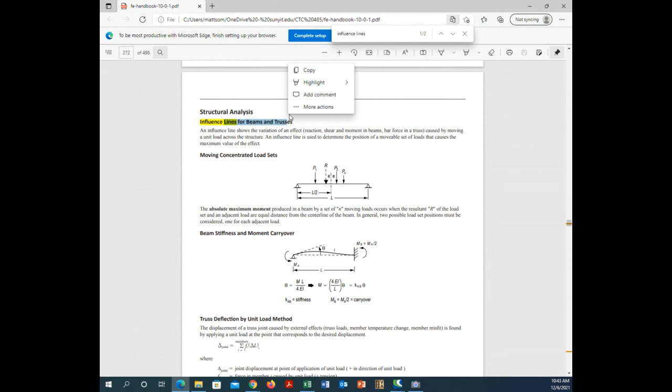That's the point of this lecture today — to help you, because a lot of you will probably go on to take the FE at some point, and if you do, hopefully this helps you out a little bit. If this lecture just confuses you, you can walk out and forget it, and it won't impact your grade at all. It just might impact how you do on the FE. This is totally just for your benefit, because I care about you guys and want you to pass the FE.

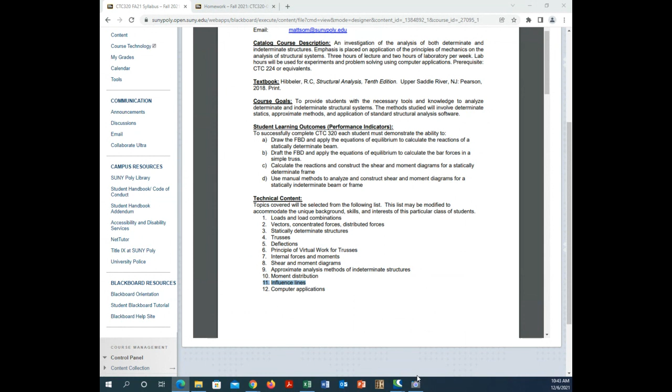So what is an influence line? Let's go back to what the FE says an influence line is. An influence line shows the variation of an effect — reaction, shear, or moment in beams, or a bar force in a truss — caused by moving a unit load across the structure.

Let's think about that for a second. If we take a moving load, like on a transportation structure, you have a car going across a bridge. Let's say you want to put a connection in that bridge somewhere. You want to figure out where that car will be to put the most shear on that connection, or where it will be to put the most moment on that connection. Does that make sense? So the influence line gives you a graphical way to figure that out.

So that's what it means — it shows the variation of an effect. If you move that load across this beam or across a truss, how is it going to impact the shear, the moment, or the bar force in a truss? How's it going to impact it? Right, so that's kind of where we're going to start.

I have another definition here that I got from somebody else as well that I'll throw down. But basically, the influence line is used to determine the position of a movable set of loads that causes the maximum value of the effect. So that's what we're trying to do — get the maximum value of that effect.

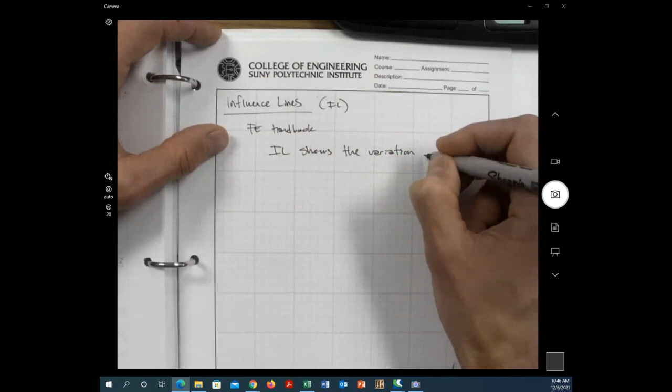we're told that an influence line, IL for short, shows the variation of an effect - and I'll put in parentheses reaction, because we can use them for reactions. We can use them for shear. We can use them for moment, or we can use them for a bar force in a truss.

And we're going to look at both of these today, caused by moving a unit load across the structure.

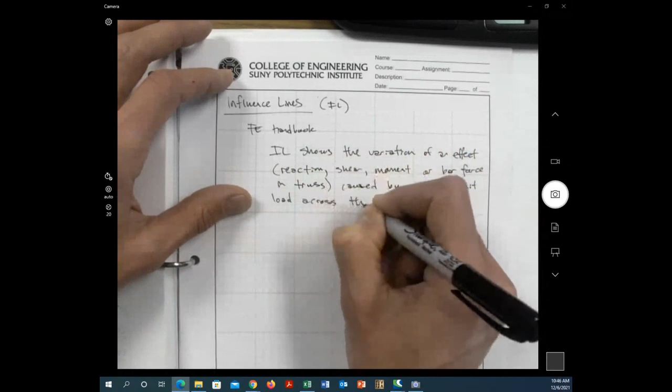So the point of this is to figure out that these are used, and the FE goes on to say that these are used to determine essentially the placement of the load that will cause the maximum effect.

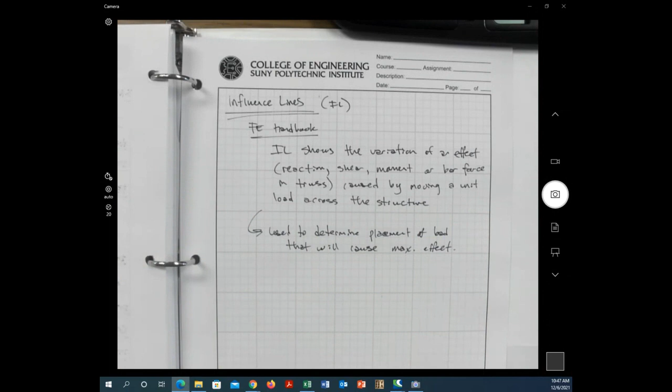So before I go too far, let's just do a case here to illustrate this, and then I'll give you another little principle of how to make it work. But before we go too far, what I want to do here is give you an idea: if we have a simply supported beam,

and I've got somebody who just likes to run across this bridge just because, you know, they like to suffer. It's okay, I went for a run the other day, and my wife's like, 'How was that?' I was like, I just walked in from outside in the cold, and I couldn't breathe. You ever do that where you go from outside breathing hard to an inside warm, like cold to warm, and all of a sudden you cough and can't breathe? She's like, 'How was it?' I was like, terrible. You know, it's like, what can I say? I can't talk.

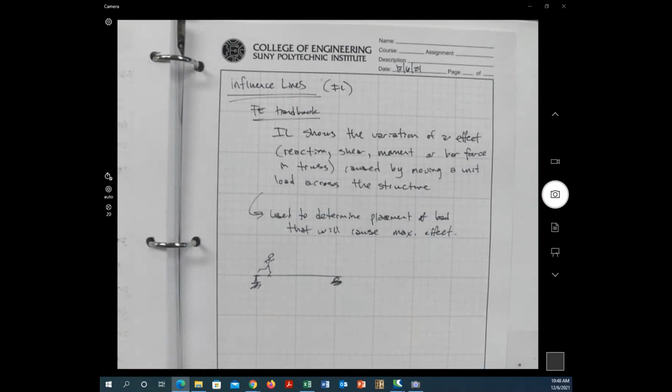Anyway, here's somebody who likes to suffer. He's running on a bridge. Let's say that bridge has some length, L, or beam L. And as this guy or girl moves, there's some distance x, so this is a distance x away from point A. Can you picture that?

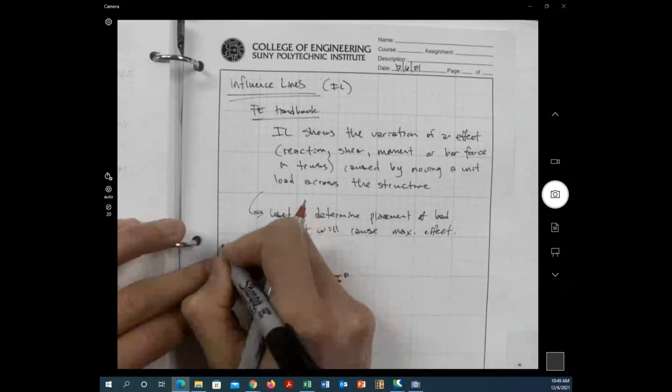So for various values of x, let's look at, for this example, the influence line for the reaction at A. Well, what the influence line essentially does is it says, okay, if we have an x value, we can find an AY value, and we can find an influence line value here.

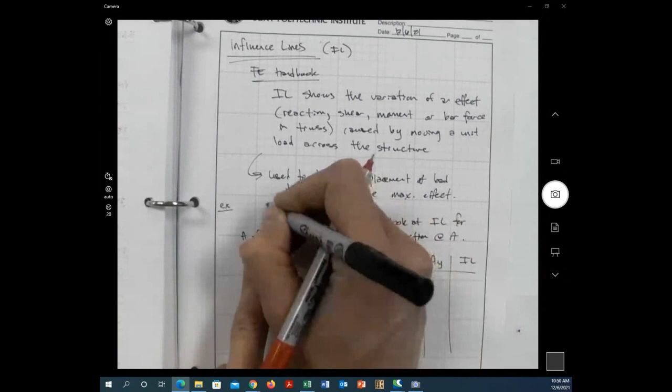So for example, if x is 0, what does that mean? It means this person - I'm going to say has a weight P - is directly over support A. So how much is AY holding up? All of P, right? Does that make sense? If x is 0, this person is right over A, so AY is taking all of P.

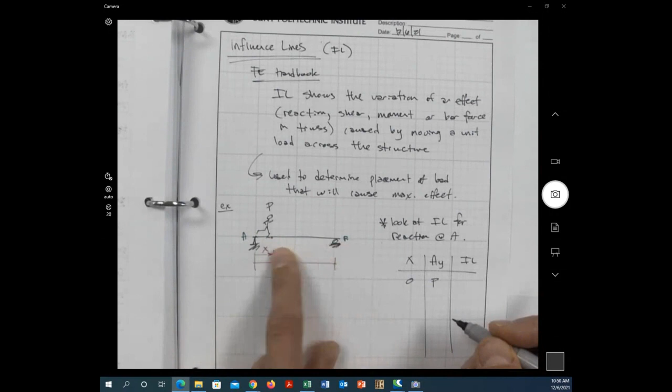Okay, I'll come back to this influence line thing in a second, but if this person's all the way at B, how much is A taking? None, right? So if they're standing on B, A is taking 0. So if x equals L, the influence line value at AY - I'm just solving AY - we know that if we solve it at B, the AY value is going to be 0 because all the force goes right to B.

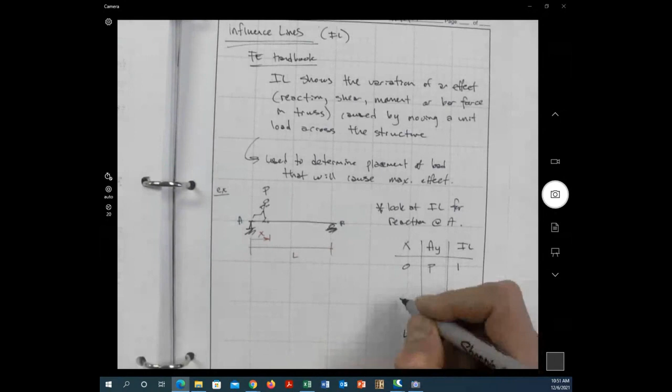We could say, well, what about 3L over 4? So if they were over here, we'd say 1P over 4. Or if they were at a quarter L, we could say 3P over 4. We could use the same principle to solve these things. This is 3P over 4, or 3/4 P or 1/4 P. Basically what we get here is 0.75, 0.5, 0.25. So if P was 1, this influence line is kind of like assuming P equals 1.

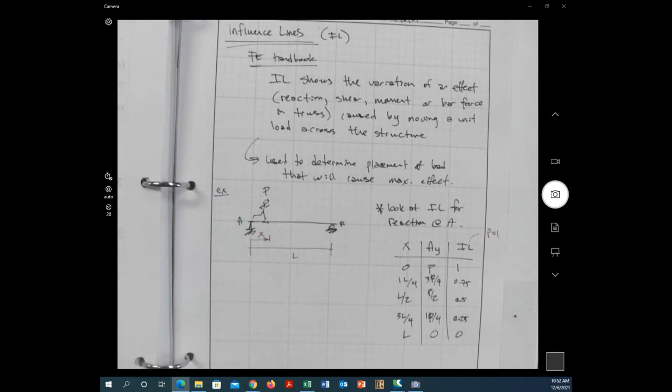So what does that mean? That means we have this chart here. I'm going to draw a couple lines down. Basically what we have here is an influence line for the reaction at AY.

Basically what we're going to do is start at 0, and we're going to plot the value 1. We're going to come out all the way over to L, and we're going to plot 0. What you can see is this is just going to be a straight line down. So this is going to be 0.5, this is going to be 0.75, and this is going to be like our 0.25.

In this case, hopefully you can do this in your head because it makes sense. If this person's standing right at A, you take P times the influence line value, and you figure out the reaction at A is going to be P. You could use this chart: if they're in the middle, P times 0.5 is going to give us the reaction at A. Or P times 0.25 if they're over here. So if they're standing right on top of A, it's going to have the most impact at A. Does that make sense? Okay.

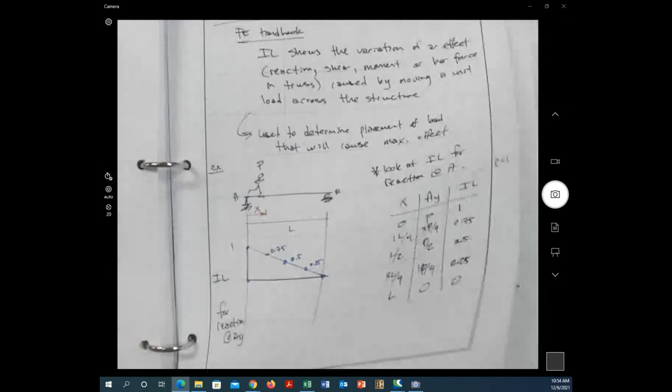So what this leads us to is kind of an idea of how to do this. This is kind of like a brute force way of doing an influence line. But there's easier ways to do influence lines, and I want to go through that next. For influence lines, there's kind of a method to make them, just like there's an approach to doing shear moment diagrams.

For influence lines, what we're going to do is develop them by adding unit displacements that correspond with what we're trying to find.

So for example, what we just did was we were looking at a reaction. For a reaction, we might have some beam here, but we want this reaction. What we're going to do is come over here and remove the support at that location, at the location of interest.

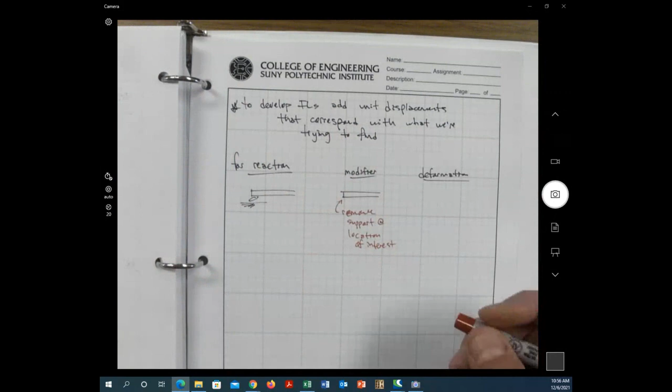So this is how we modify it. And then the deformation we're going to look at is what I said up here, we're going to apply a unit displacement. So if we want the reaction in the vertical direction, let's look at a unit displacement. Let's say maybe this had a pin on this side. If this had a pin on this side, we leave the pin on this side, then what's a unit deformation look like? It says, okay, we started with a beam that was flat, and what we're going to do here is apply a unit deformation of 1, and now we're going to take a look at this thing again.

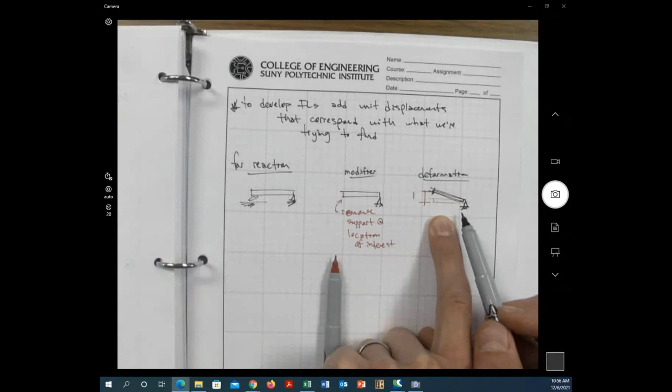And that becomes our influence line. So what we just did here is basically solve for our influence line. All we did is say, okay, we want to know about AY. We're going to take AY off, then apply a 1 unit deformation in the direction of the force, and that becomes our influence line. So our influence line is just this 1 unit deformation, and that's all it is, it goes up to 1, and then back down to 0 here because we know we're constrained by no deformation at the pin over here. Does that make sense? So all we did was take this out, applied unit 1, and got our point.

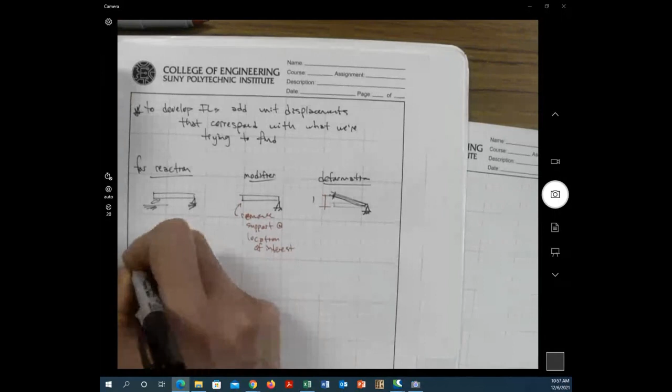Okay, we could also have a couple other things. We could also be looking for shear, so for shear at a point.

So we might start with some beam, and let's say we want to find shear at this point here. What we're going to do is modify this by adding essentially a vertical roller. The way I'm going to show this is I'm just going to put a roller like this. Normally I only do 3, but here we add a vertical roller.

Okay, so if we still had our simply supported beam here, what's that going to look like? What's our deformation going to look like here?

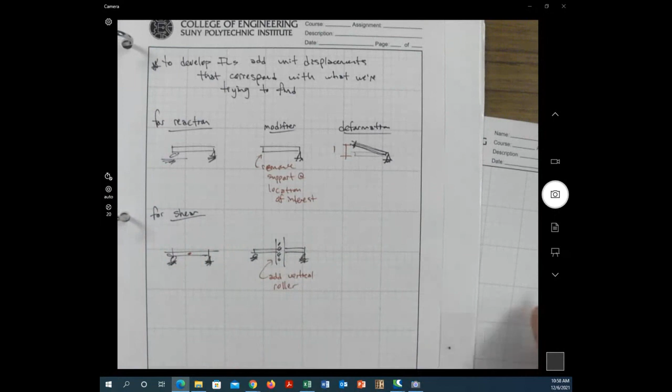This is where we have to understand our sign conventions a little bit. Our shear sign convention basically says this: on the right side of the beam, it's going to go down. On the left side of the beam, it's going to go up. That's our positive sign convention. So that's what we're going to start with here. If you remember when we drew our typical positive, the right side's down, left side's up, positive tension. This is our general positive sign convention. So the right side of the beam's going down, the left side of the beam's going up.

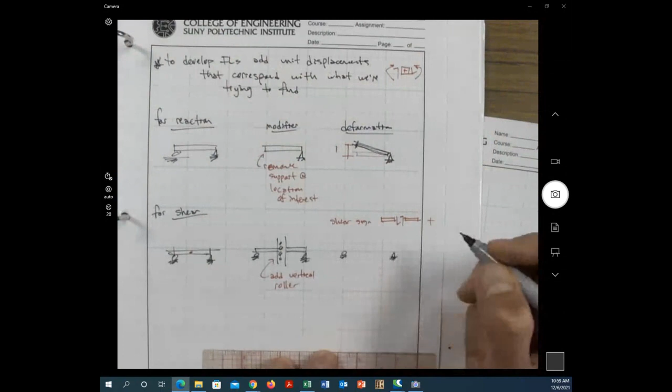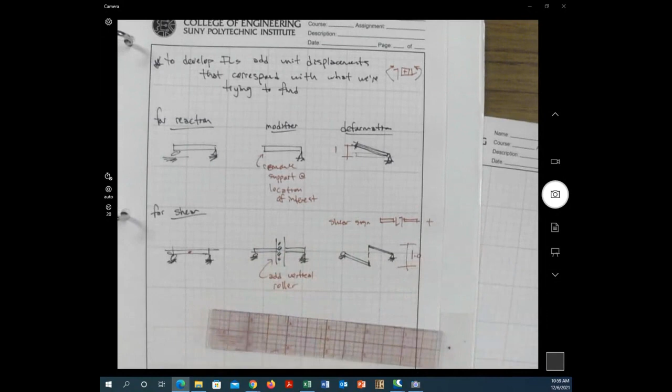So what does that look like over here? The left side's going to go down, the right side's going to go up. And if this is connected, basically what we know here is this total deformation is going to be 1.0. So if this is right in the middle of the beam, it's easy - it goes down a half and up a half. If it's not in the middle of the beam, it has to be proportional so that these slopes are the same.

Okay, so that's kind of the idea with shear. And then lastly, for moment...

Right, we can start with this beam, and let's say we want to find the moment at this point. What we're going to do is we're going to add a hinge or a pin.

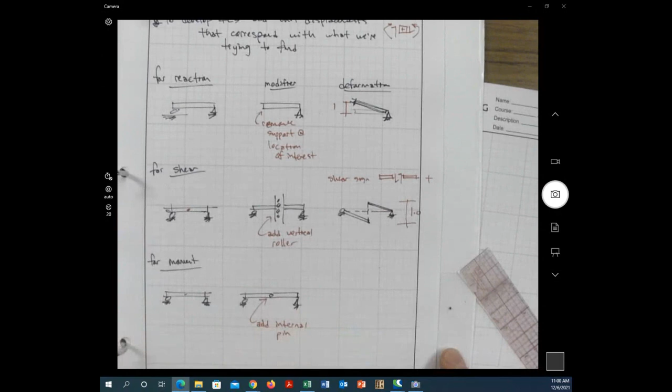So we allow the moment to rotate. Like here, we allow this thing to move up and down, like we allow it to shear. Here, we allow it to rotate because we're looking for the moment. We kind of release that moment, just like in the moment distribution where we lock it, we temporarily fix it. Here, we kind of add an internal pin to release it.

Okay, and what does the deformation look like? We want to apply a unit rotation, which means basically what's going to happen is we apply in a positive sign convention, kind of like up here - we put tension on the bottom, compression on the top. This thing's going to push up, and it's going to come up to something like this, having a unit rotation.

If this is theta A and this is theta B, if I were to bring this out here, this whole deformation is 1.0 - the whole angle is 1.0. So theta A plus theta B equals 1. And for small deformations, we can just work with it directly.

So that's great, Mark. We sort of did it for this - how does that work out? How does that play out? What does that actually look like for something that's a little bit more complicated? Do you want to look at something maybe more complicated? Why not?

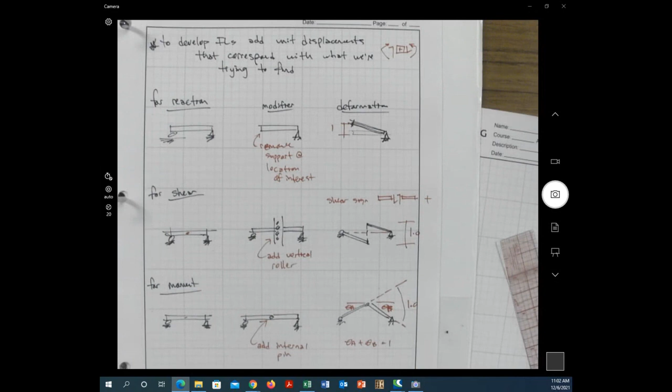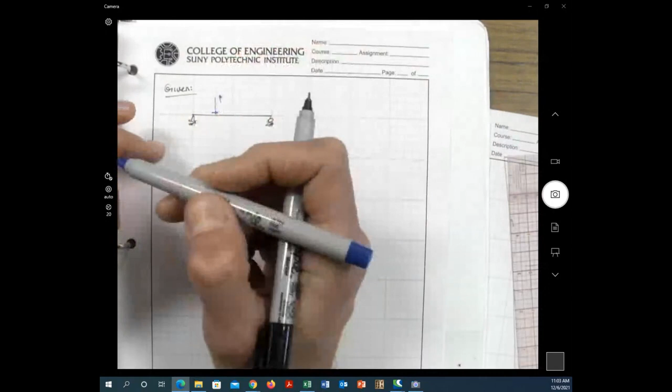Okay, let's start with an easier one and we'll go to a harder one. So let's look at that same beam that we started with, and let's say that we have a beam here that's simply supported, and what we're going to do is have some load P that can be moving across this beam, just like we did when we started. So this is going to be some distance x, and this total length, let's call it L.

So what we want to do is find the influence line for moment at the center of the span.

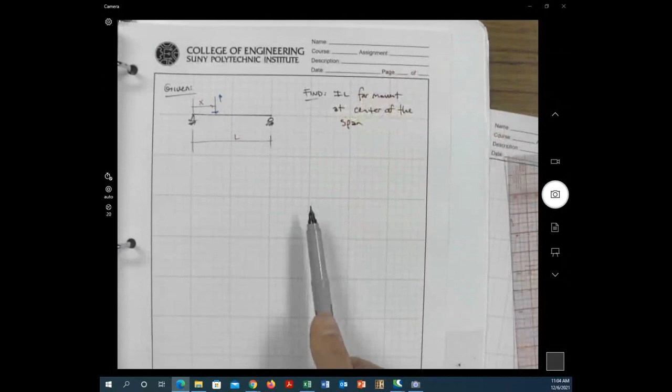Right? I mean, intuitively, we don't really need an influence line for this, because intuitively, what do we know? We know that the moment at the center of the span is going to be biggest when P is at the center of the span. Does that make sense?

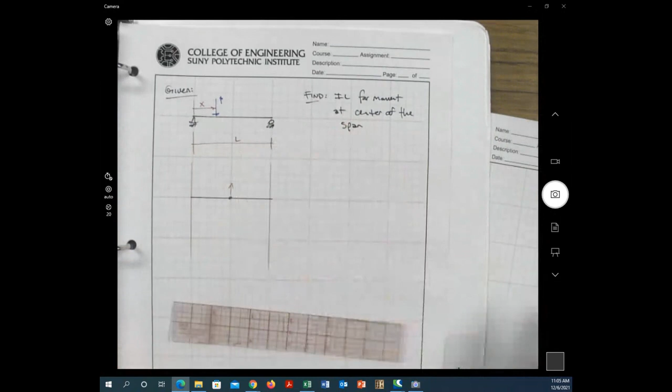But the influence line kind of helps us a little bit, and I'll show you a little bit why. Let's take a look at what that looks like here. So if we were to draw our influence line, we're going to start essentially with this diagram, this beam. We're going to add this hinge in, and then we're going to push it up so that we get essentially a rotation here.

So this becomes our rotation. And what we know here is we're going to have theta A, theta B, right? And we know that theta A plus theta B equals 1.0. Because it's symmetric, this makes it a little bit easier, theta A is going to equal theta B. If we didn't know it was symmetric, we could also solve it, and we could definitely solve it. I have that example here if you want to go over that one too.

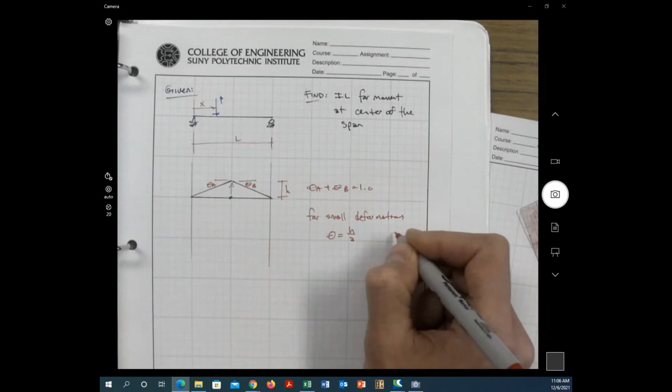But for small deformations, theta is going to essentially equal h over a. So what we want to find here is what this height is, and so if we have h, we have theta, and we have a, we should be able to solve for h. Here we know this is L over 2 because we were told we want it at the center of the span.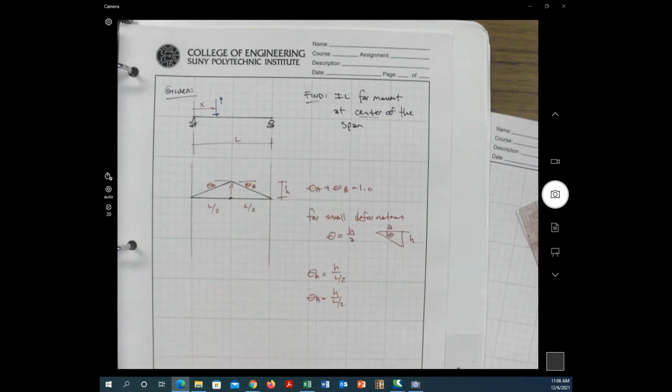Right, so what's theta going to be? Well, in this case, theta A equals H over L over 2. Theta B equals H over L over 2. And because these are the same, you can see that these two are going to be the same, theta A is going to equal theta B. But when we plug these in, what are we going to get? We're going to get H over L over 2 plus H over L over 2 is going to equal 1.0.

I don't like that L over 2 thing, I'm going to say 2H over L plus 2H over L equals 1.0. So what do we get? We get 4H over L equals 1.0. We get H equals basically L over 4, because if we multiply both sides by L, we get L over 4.

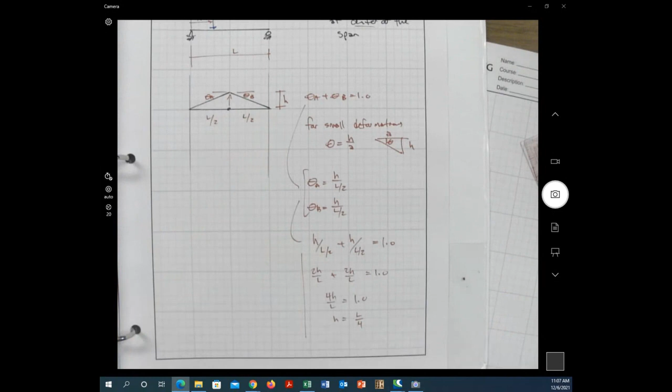You see that? Okay, so what does this mean? That means our influence line is going to look like this. We're going to come up to, I'm sorry, L over 4. This has a maximum value of L over 4. So if we said, for let's say L equals 40 feet, this value here is going to be 10.

Why is that helpful? Well, if P equals 60 kips, the person just got really heavy. Actually, it's more like a big fat truckload. Let's say it's a big fat truckload. I mean, we could do 60, we could do 40, we could do 20. But let's say P equals 60 kips, L equals 40 feet.

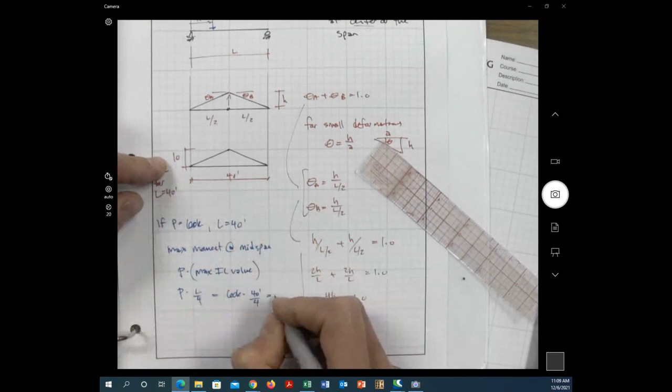The max moment at the midspan is equal to what? Well, it's basically equal to P times the max influence line value, which is P times 10. In other words, it's P times L over 4, which is equal to P, which is 60 kips, times L, which is 40 feet, over 4. Or really what it was, P times 60 kips times 10 feet. So the max moment is going to be, what, 60 times 10 is 600 kip feet.

Okay, it's a little convoluted, but let's just play this game for a second, because what we can do is we can also find, well, if the load P is at 10 feet, what's the moment? Well, instead of being 10, it's going to be 5. So 5 times P, 5 times 60 is 300.

That makes sense? So if I take this and we come back into visual analysis, I shouldn't have made it 40 feet, that's too long. Actually, no, I can't fit 40 feet on here. So if I make this 40 feet and instead of using the vertical axis, I'm going to make this a plane frame. I'm going to make this simply supported.

Okay, I can put a load on this member. I'm going to do a point load, a single point, and say minus 60 kips. So if my offset's 20 feet right now, that's right in the middle, and I can take this beam.

I can go to result view, member graph. What we see is the maximum moment 600, just like we found.

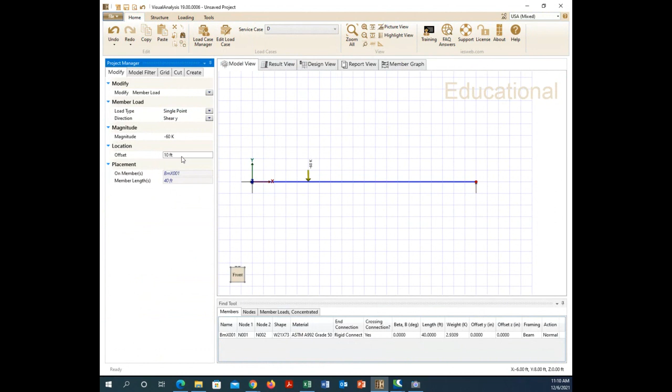But the other thing we can find is, if I come back here and say, well, how is this influenced if this is at 10 feet? What we just said is, if this is at 10 feet, this value on our influence line is 5. So 5 times P, 5 times 60, gives us 300.

That should give us our moment here. So if we come back to result view, our maximum moment at the center, not at this point, our maximum moment at the center is 300.

Again, this is just for the center of the beam. This is the influence line for the moment at the center of the beam. It doesn't mean it's the maximum moment at this point. Just because the load's there, the maximum moment will also be there, but the moment at the center is going to be 5 times P.

Make a little bit of sense, kind of, sort of. Let's look at one a little bit more complicated, then we'll go to trusses. Again, this is super brief. I wish I could do more, but at least it gets you in the ballpark, so if you study this stuff later, you've seen it to a certain degree. Maybe you'll care then. Okay, but let's look at this.

Let's look at something like this. For the beam shown, find the influence lines for shear and moment at C.

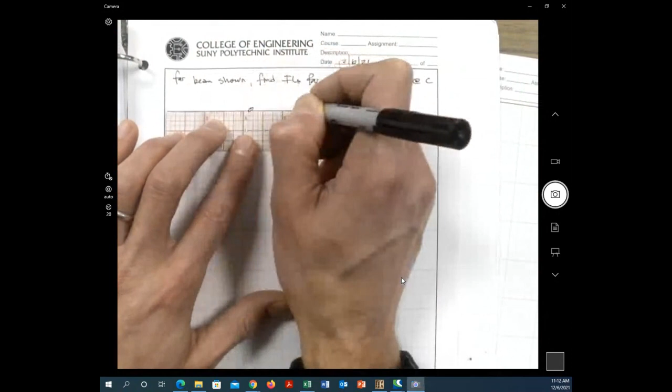Let me draw you a beam here. I'm going to start with a free end that goes to a roller, that goes to a pin. So this beam is going to look like this. Let me give you some dimensions, and some points too. I'm going to call this point A, this point B, the middle point C, and this point D.

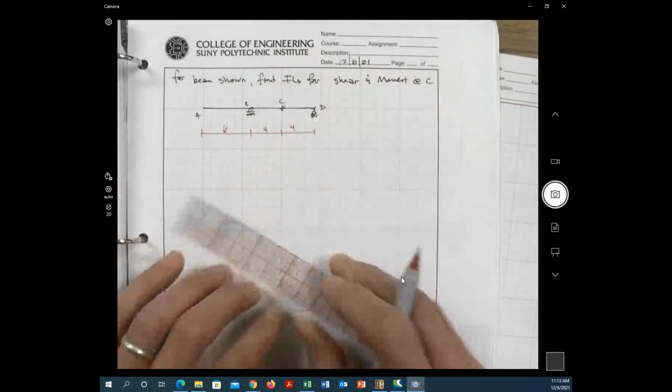What else do we want? We're going to call this 6, this 4, and this 4. And this is P, and it's going to move some distance X. I probably should have put the P on the other side, but whatever. It's going to move across the structure, across the beam.

So let's start with shear. Shear is kind of a tricky one, but let's start with shear. I mean, we could just brute force this. If you were on the test, you could put that force at a whole bunch of points and try to figure out which one makes C the biggest. We could guess over here, guess over here, guess a bunch of different places, and try to figure that out.

I went and I think I made a model of this beam. Let's see if it opens here. I put this beam into visual analysis, and we could take a look at it.

Basically, I have a 1 kip load somewhere on this beam. If I go to my result view, I have a member graph, and at this point C, I have a moment of 1.5 or whatever it is. And I could do that for a whole bunch of points.

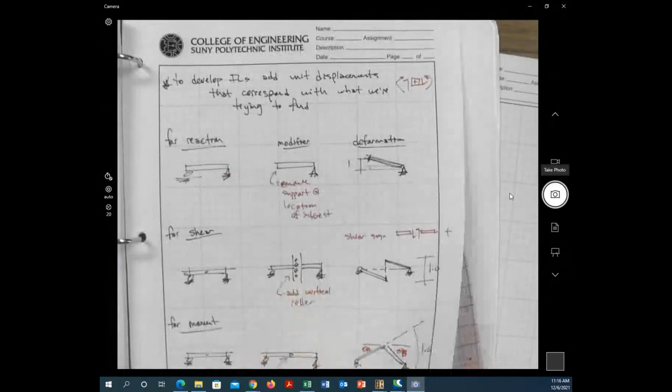So rather than manually incrementing that load across it, what we're going to do is come back here, and if you remember what I said with shear, we're going to add this vertical roller. So we're going to come in here and take this thing, pull it down here, and at point C, I'm going to add a vertical roller.

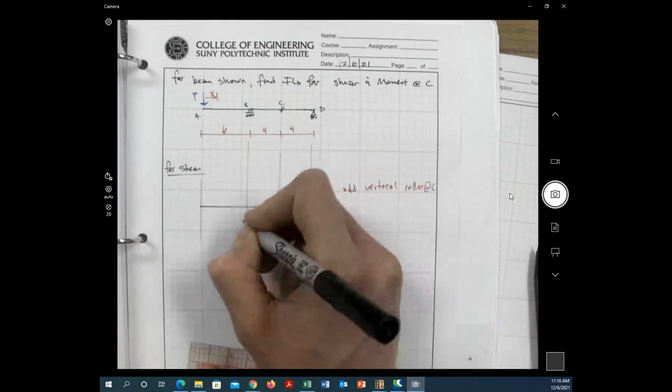Okay, so what's that look like? Basically at C, we're going to have this vertical roller. We're going to have the beam. Everything else is going to be the same. So that got added in.

And then this next thing that we're going to do is we're going to apply a unit deformation for positive shear. Okay, so what's this going to look like? We're going to start with, this is going to go down on one side.

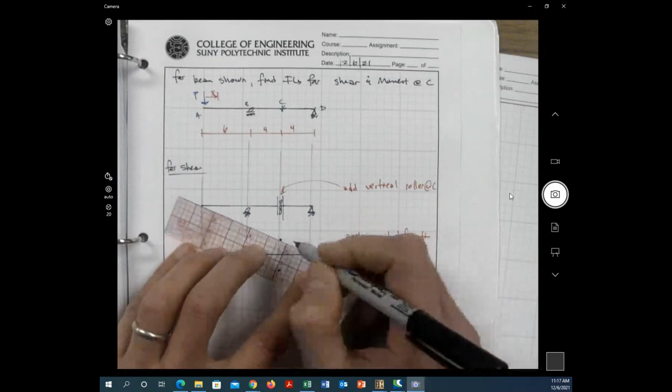Right, so our positive shear says on the right side, it's going to go up. On the left side, it's going to go down. So it's going to come down a certain amount over here, and up a certain amount over here. Now we have to connect the dots. The other thing is, after you apply the unit deformations, you keep straight lines. You have to keep straight lines. And if you can't keep a straight line, the thing doesn't move.

But also we know that deformation's constrained at these points, at the roller and at the pin. So we're just going to come back in here and make it look like that.

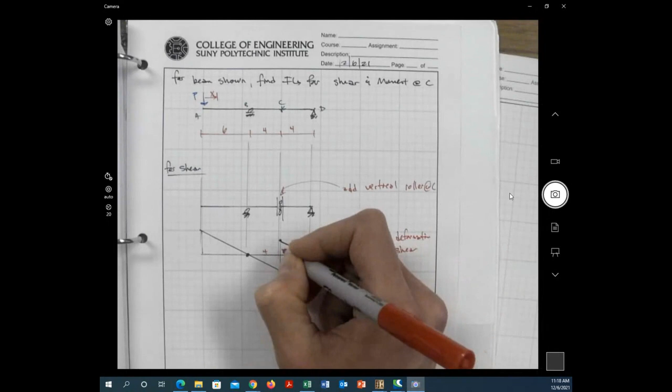So this one's a little bit interesting, I guess, but if we know that this total distance here is 1, and we know this distance is 4 and this distance is 4, we know that we have to come up a half and down a half essentially.

So when we draw our influence line, now we're going to label these values here. It's basically going to be the same diagram, just with the points labeled. I'm drawing this to scale, and it does help to draw it to scale to some degree. But because these are equal, we don't have to go through that theta A, theta B thing. This is going to be 0.5, this is going to be minus 0.5.

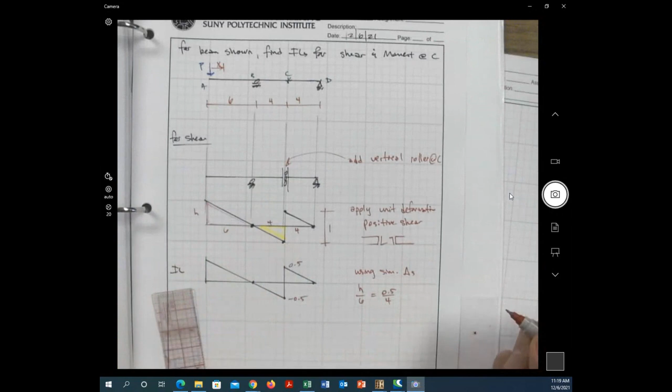Okay, and then the trickier part is, what's the value over here? Now we have to use similar triangles. There's one triangle that looks like this, and one that looks like this. I'm going to call it 6 and H. So using similar triangles, we can say H over 6 equals 0.5 over 4. So what does H equal? H equals 6 over 4 times 0.5, so 0.75.

So this is 0.75. So in theory, what this means is the maximum shear at C will occur when P is at A. And the shear value at C when P is at A, so V of C for X equals 0, P is at A, right over here, this is going to equal 0.75 times P, whatever value of P we have.

So can we prove it to ourselves? That's where I think visual analysis really helps illustrate this process and wrap it together a little bit. It's nice to be able to go back and forth from theory. And granted, you won't have visual analysis on the FE, which is unfortunate. I mean, that'd be so nice if you could have visual analysis on the FE and just plug things in.

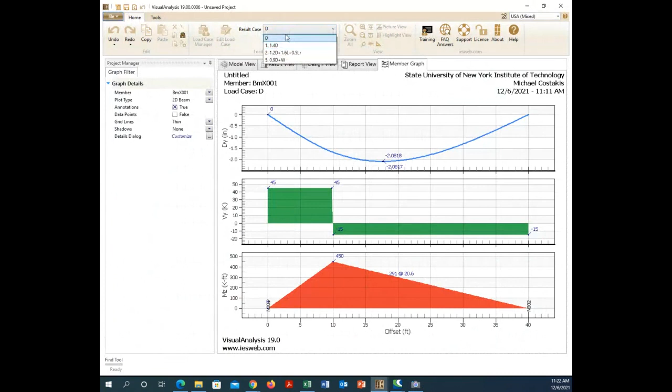Okay, so if we come down here and go to, where are we? Wrong one, sorry. If we come back here and go to the right one and go to number 3, we get that value of 0.5 and minus 0.5, depending on, this is a little weird with the signs, but it's 0.5. And then if we come back here to number 4, we go back to 0.

So this influence line shows us that the maximum shear force at this point is going to be when this is 0.75. Remember the signs were a little bit weird, but let's take a look here for a second. So I also put in a member load somewhere a little away from point C. We would expect a positive shear at point C based on this load, right?

So our influence line says if our force is somewhere in here, instead of 0.5, maybe 0.375. If we come back to here, this is offset by like a foot from point C. So if this is 4 feet, this is offset a foot. That's 3/4 of 0.5, but let's look at what we get.

So if we come back here and go to our member graph and come back to this D, that's where our shear is a positive 0.375. It actually did work based on this value, right at this point. So if we were looking at putting the load right here, we get 0.375. Does that kind of make sense?

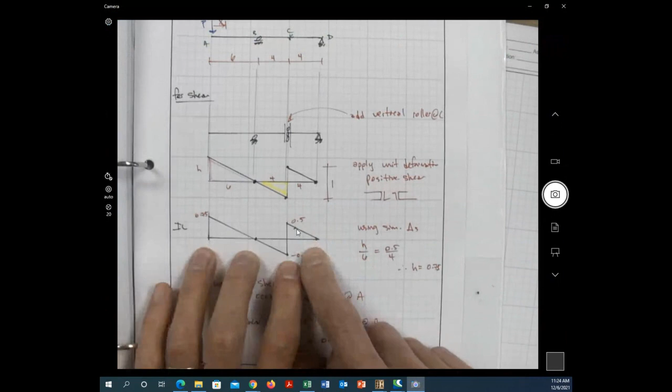So this influence line represents the shear at point C. So for any location where you place that P load, the shear at point C is going to be represented by this influence line.

I'd ask if there are any questions, but I'm sure there are, and you guys are just brain dead. So, no, do you have any questions? I mean, is this making a little bit of sense? It's kind of a screwy concept, but it works.

I'll show you a truss one later. The truss one actually shows up on, I think it's like if you buy the NCEES FE practice test, the truss one shows up on the practice test. So I'll show you how to do a truss one. Let's do a moment one here first while we're still on this, but then we'll go to the truss.

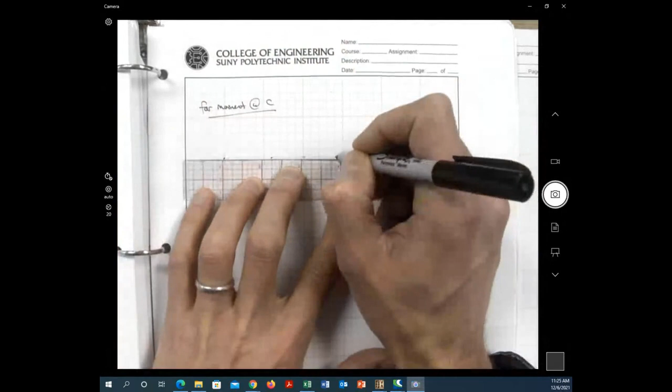So we'll go to the moment here. So for moment at C, I'm just going to redraw this thing kind of in here. What we're going to do is we're going to redraw this, but because we're dealing with moment, we're going to add a pin.

Okay, and then how is this thing going to rotate? This thing's going to rotate. Basically, what we know is it's going to have a unit rotation, and this is going to come up to some point, but we're constrained by this point here. This can't move. We're also constrained by this point that can't move. So we're going to end up with something that looks like this.

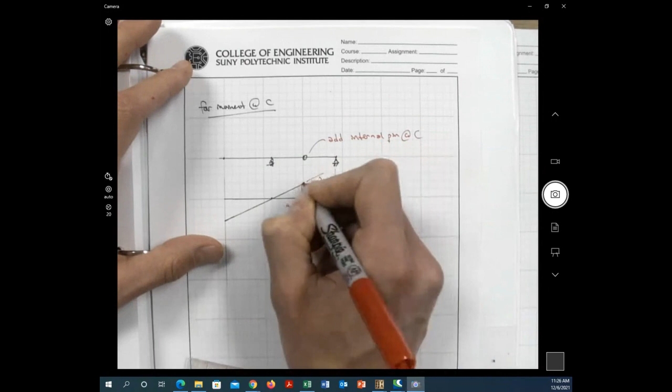So again, if this is 4, this is 4. This total deformation here is 1. What we know is we have kind of like theta, and this actually kind of matches what we've already done to a certain degree. But what we know is theta equals h over a, roughly, for small deformations it works. So in this case, we're going to see what that means.

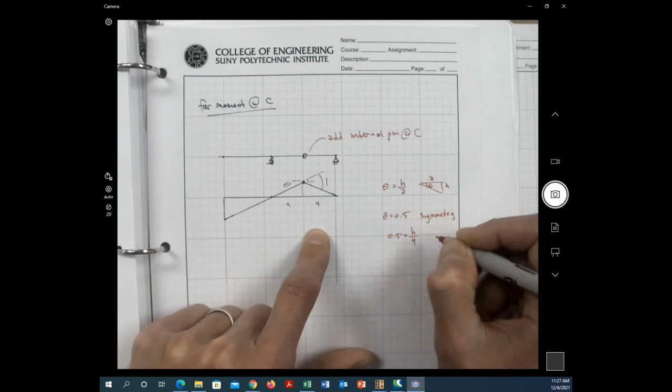Because these are symmetric, we know that theta equals 0.5, for theta equal to 0.5 symmetry. If it's not symmetrical, forget it. It's going to take longer, but basically we have 0.5 equals h over 4. So h equals 4 times 0.5, which is 2.

So if we come down here and draw our influence line, this is for moment at C. What's this going to do? It's going to come up 2, back down to 0, back down to 0. And hopefully you can see what this value is here without having to do similar triangles.

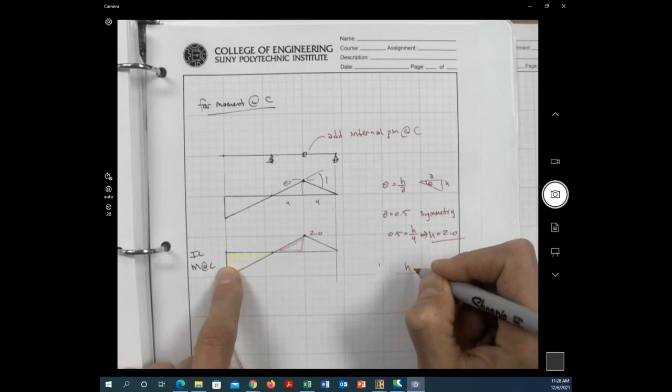But if you need to, you could do like the height at A over. We could use similar triangles here, just like we did before. So we have a similar triangle here and a similar triangle here. If this value is 2.0, we could say that the height at A over 6 equals the height at C of 2 over 4. So the height at A equals 1/2 of 6, which is 3.

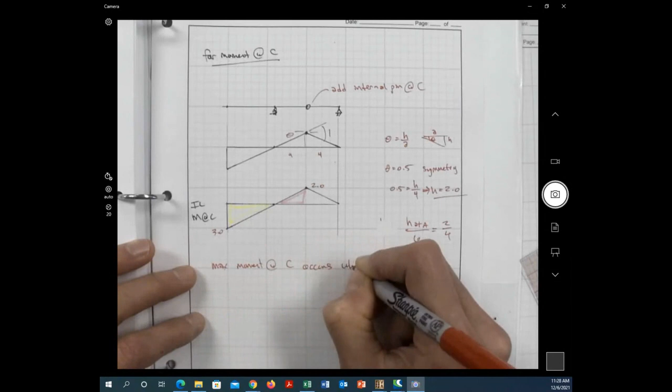So in other words, it's a similar kind of process. The max moment at C occurs when P is at A, because that's the biggest value on our influence line. I could say the max negative moment, because this is negative. The max positive moment occurs when it's right at C. But the max negative moment occurs when P is at A, when it's over at this point. So the max moment value, M max, equals -3 times P. That's when P is at A.

That's when P is at A. So we could prove that to ourselves. We can come back to visual analysis, and we can prove that to ourselves here.

So let's look at trusses. This is the type of problem where, could you see it on the exam? I wouldn't be surprised, in the sense that the NCEES practice exam has one of these. So it's worth looking at. Basically, let's say that we have a truss, given.

Let's say we have a truss, and I'm going to make this truss relatively simple. I'm going to put 4 feet. I'm going to make the truss look like this. Everything's 4 feet except for the diagonals, that's 4 times root 2. I'm doing that just to make it a little bit easier, but let's take a look at this.

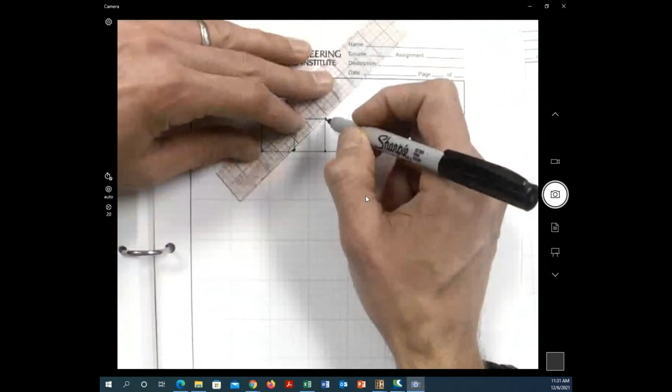So if this is our truss, let me make it simply supported here. And let's say that we have a car or some little something that's pretty small. If this is 4 feet, but this thing's going to move across the bridge. I mean, we can make these 4 meters if we wanted to. Let's make them meters, that probably makes a little bit more sense. It doesn't really matter honestly, the units don't matter so much. But let's make these 4 meters just to make our car to scale a little bit better. And then vertically, we're going to say 4 meters as well.

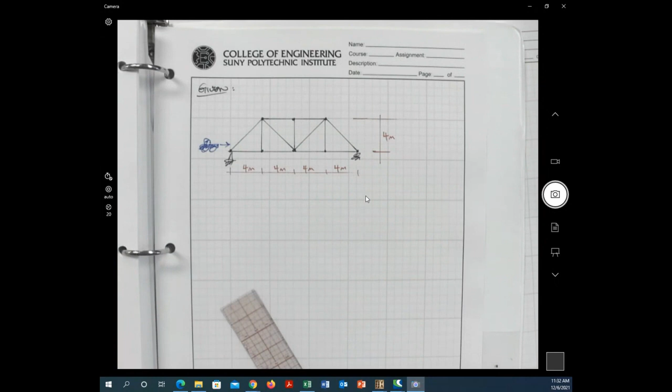And we haven't really talked about how to do influence lines for a truss, but let's start with which member do I want to start with? Let's start with member... let's find... let's do this, let's find the value of x that will make member CH...

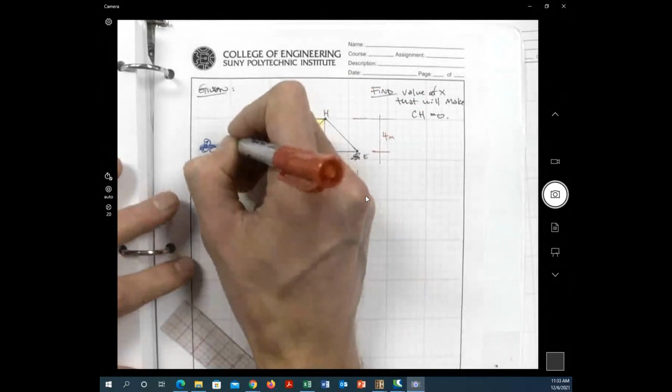Okay, so let me label these points. I'm just going to go across the bottom, A, B, C, D, E, F, G, H along the top. So what I'm going to say is let's find the value of x. This is the member that we care about, CH. So this is going to go some distance x, right? It's going to move some distance x. What distance x will cause that member CH to equal 0?

Okay, so we're going to use an influence line to solve this. So step one, we're going to solve for the influence line.

But basically, to solve for the influence line, if we think about a truss for a second, this force is going to be placed at one of these nodes, or transferred to one of those nodes, or some combination of those nodes. If it's in between, half of it would come this way, half would come this way to evaluate that one. So all we really care about is at the node. Does that make sense?

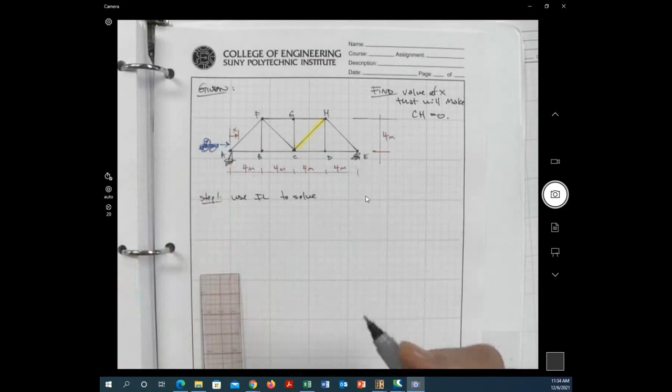But for trusses with a point load, basically what we want to do is solve the truss with the load on either side of the member.

What do I mean by that? If this car is right at point A, all the force is going to go to point A. CH is going to be 0. I'll put not at support.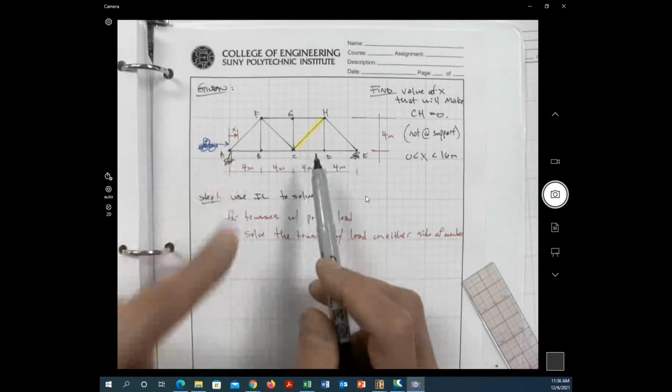So X is greater than 0 and less than 16 meters. We have to find some value out here where this thing is going to be. But at the support, we know it's going to be 0. At the other support, CH is going to be 0 because all members are going to be 0 if it's at the support. But what we want to do is take this truss and solve it.

So step one is we're going to solve this. If we put that force right here, if this is one side of C, we'll put that force right here. I'm just going to start with a 1 kip force here, pulling down - it doesn't matter, it just shows up better down here. This is saying apply 1 kip force at C.

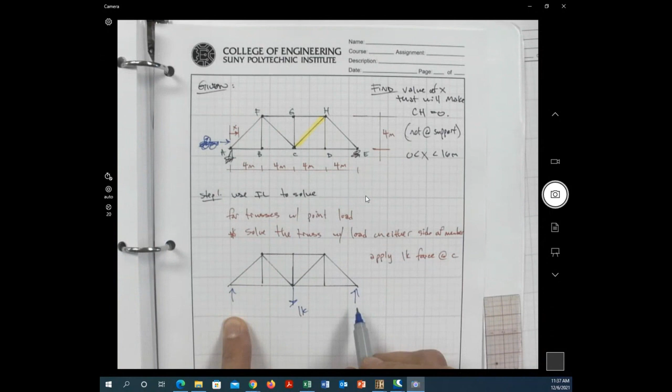If we do that, what do we know about these two reactions? Can you do them without summing moments? What are they? Yeah, 0.5, a half. This is symmetric, so it's just a half and a half. So those are our reactions.

And can you solve for this member force pretty quickly? In other words, do you know how to do method of sections without struggling through it? So if we draw a section, what do we have? Our section is going to look like this. We're going to have 1/2 a kip up.

We're going to have some force here, which is CH down. We're going to have some force here, some force here. But really, the other thing that we know is this is going to be CHY, and this is going to be CHX. That makes sense? Do you remember how we solved this problem?

Sum of the forces in the y direction equals 0. CHY equals 1/2 a kip. Remember that? That's in tension, that's positive. So what does that mean about CH?

Do you remember what CH equals, or do you have to do your triangles? The triangles for this one are pretty simple because what we know is we have 4, 4, and 4 square root of 2. Make sense? Because there's a 45-degree angle, 4, 4, 4 square root of 2.

So what does that mean here? It means CH, therefore, if we do our similar triangles and we say CH, CHY, and CHX, we're going to say CH equals CHY times the square root of 2. The 4's will drop out.

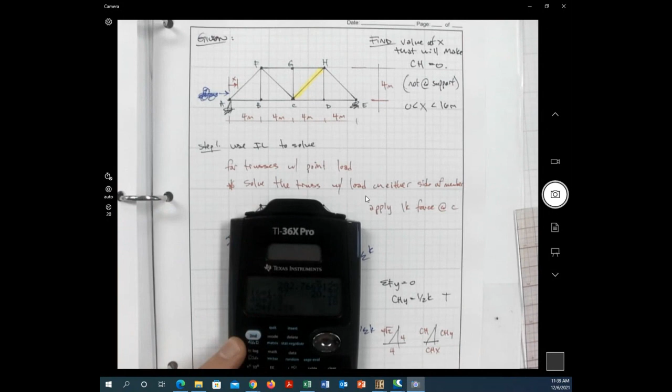So CH equals what? Is that 0.70? 1/2 times... let's find it. 0.5 times square root of 2. Yeah, it's 0.707. Square root of 2 over 2 is 0.707. That makes sense. So that's for case one when P is at C. That's 0.707 kips.

Everybody okay with that? Do you remember how to do method of sections? If not, this is a good review for the test, the final. At least this part of it is.

Would you be expected to do something like that quickly on the FE? No doubt. I would not be surprised if you get some sort of truss question and have to solve a member force pretty quickly on the FE. No question, that's a 3-minute question. This whole influence line question is more than a 3-minute question because you have to do it again.

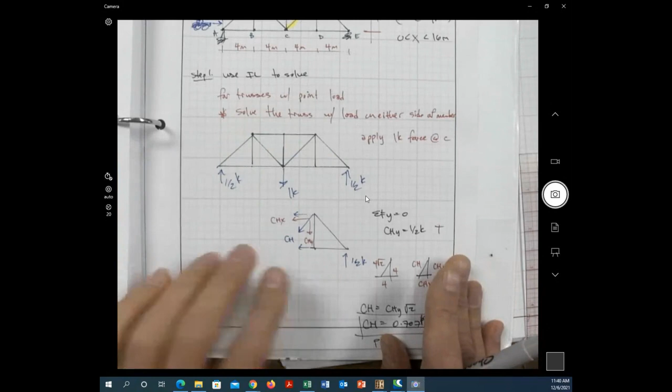You have to next, solve the truss with load on either side of the member. So we started at C, then we're going to go to D. We're going to apply the 1 kip force at D. Let's do that again. If you want to practice, you can solve this fairly quickly, maybe even before I'm done drawing it out. Let's take a look.

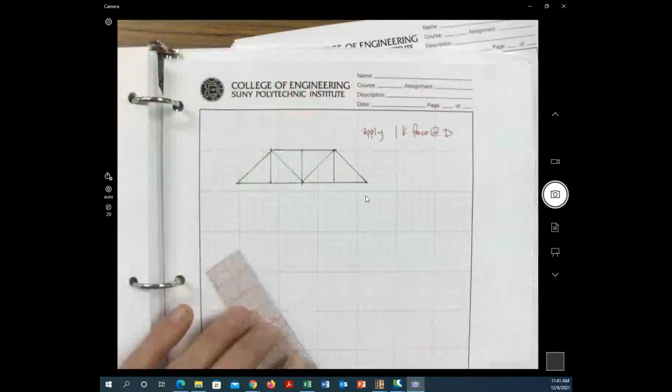So what I'm going to do is apply this force here. What does that mean about my reactions? What are my reactions? If these are all equal, do you remember anything we just did about that influence line for the reactions? How much is going to be on this side? How much on this side? We're going to get 3/4 on this side and 1/4 on this side.

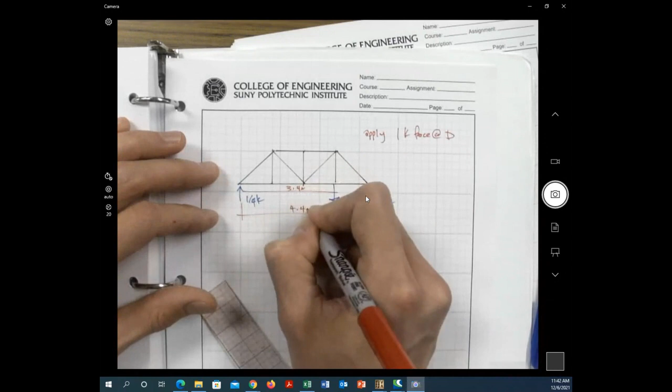You could sum moments about point A and solve it if you want, but hopefully you're starting to get to a point with structural analysis where you can see beyond needing to apply a sum of moments equation, and start to see the answer. This is just a ratio of 3 to 4. This distance is 3 times 4 meters, and this distance is 4 times 4 meters, which is 12 meters and 16 meters. But you can see that ratio of 3 to 4 gets us over to this point.

So then what do we do? Then we have the same thing kind of, sort of, but now we have 3/4 up, we get 1 kip down. We have these different forces here, so we have CH, CHY, CHX. Again, all we're doing is summing forces in the y direction equals 0.

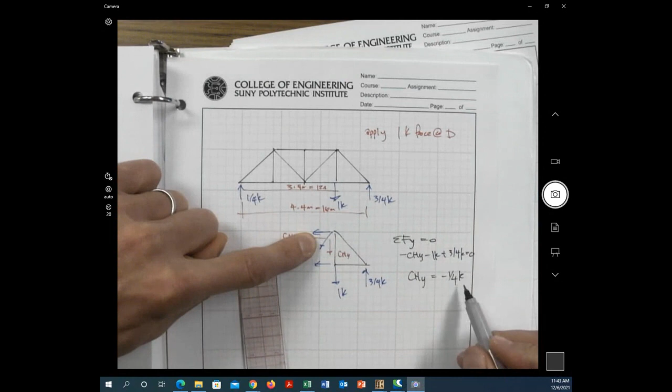What do we get? We get minus CHY minus 1 kip plus 3/4 of a kip equals 0. So if we put CHY on the other side, we get CHY equals minus 1/4 of a kip. What does that mean? It means it's out of tension, now it's in compression. So what does that mean? It means CH equals minus 1/4 of a kip times the square root of 2. What does that work out to be? Minus 0.25 times the square root of 2 is minus 0.3536. It's some value, but this is in compression.

What I want to point out here is what happens when we move this load from joint C to joint D. What just happened? It went from tension, 0.707, to compression. So what has to happen in between? If it goes from tension to compression, it has to go to 0 at some point. Does that make sense? So let's draw our influence line next.

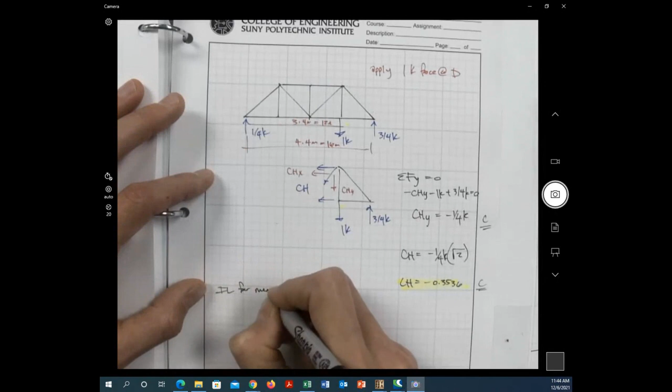So our influence line for that truss member, CH, is going to look like this. We're going to have an influence line that looks like this. Hold on, let me get the points drawn in here. I'm just drawing 4, this is every 4 meters essentially. So what we're going to do is start at 0 and end at 0, because if the force is right over the support, there's going to be 0 force in CH.

And then what are we going to do? When it's at C, in the middle, we know it's 0.707, 0.7071. So we're going to come up, when it's up here, we're going to come to 0.7071. And then when it's at point D, it's minus 0.3536. All we're going to do here is just connect the dots.

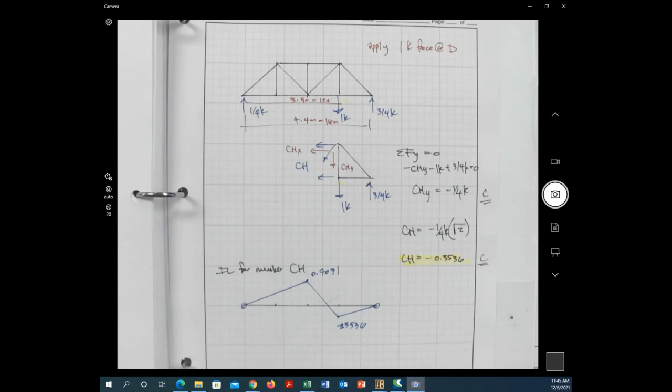So what we're trying to find, that's the influence line. If we place that force anywhere along that bottom chord, assuming the force transfers proportionally to each side, we're going to be able to figure out what the force in that member is, if it's placed anywhere along the bottom of that truss.

Does that make sense? So if it's placed at the support, the member in CH is going to be 0. If it's placed at point C, that's going to give us our maximum, which is 0.707 times whatever the value is. If it's placed here, it's going to give us our maximum compression value. And if it's placed here, it's going to go back to 0. So somewhere in between, we're going to be able to get that value.

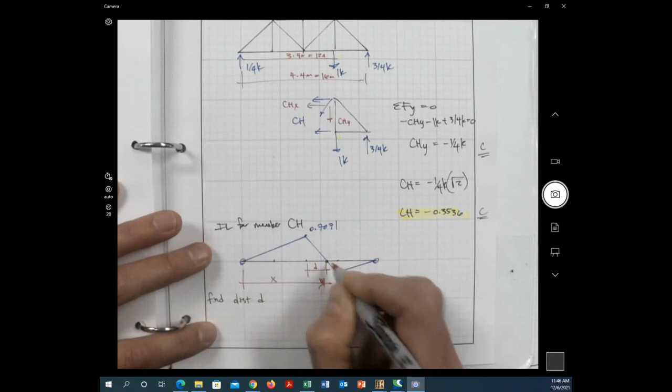And what we could do is use similar triangles here to figure that out. So let's use our similar triangles to find this distance, I'm going to call this D. Let's find this distance D, right? This is the distance D because ultimately we want this value X at which this point is 0. So what's D? We have to look at similar triangles, and similar triangles you probably hate after this class.

But we've got one triangle there, we've got another triangle here that we know all the information on, right? So our two triangles look like this. We have one triangle that goes from D to 0.7071, and the other triangle goes 4, and what's 0.7071 plus this one here is going to be 1.0607.

So if we want D, I'm going to say D over 0.7071 has to equal 4 over 1.0607. So if I take this and multiply it by 0.7071, I get 0.75 D, 0.75.

So the question is, does it work? I sure hope so, because that would be a terrible way to end the class if it didn't work. I actually didn't put it in yet, so let's see if it works. I don't know, let's go for it. Let's see if it works.

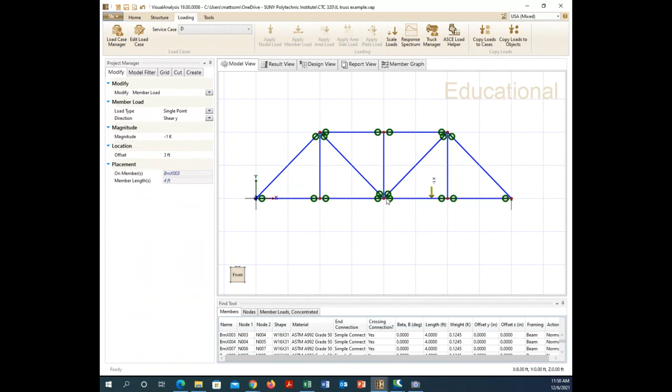It's kind of a cool thing, but what we could do is come back here, and instead I can come to new load case. I'm going to apply a member load, a point load, a shear. I'm going to say -1, and do an offset of 3. So this is 0.75 away from over here, and if everything worked out, I really hope it did.

We get almost 0. Oh, come on, that'd be so nice if it was actually 0. It didn't work out to 0. And that makes me sad.

Well, I guess I'll need to go figure out why it didn't go back to 0. I'll go figure that out. Oh man, really? That's killing me. Okay, I'll need to figure out why this didn't go to 0. I'll figure that out, and we can talk about it next time in class, and then we'll finish our review.